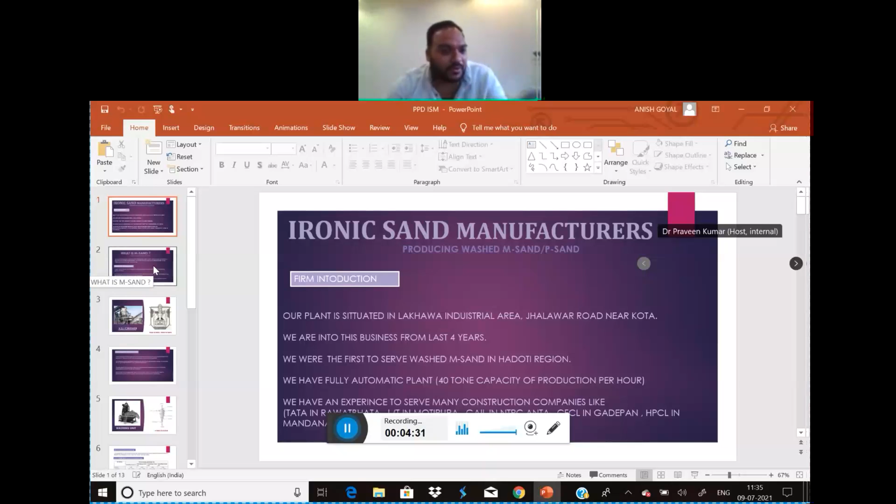So I would like to draw attention now to the basic point for which we are here, and that is what M sand is. M sand is manufactured sand. M sand is a crushed aggregate produced from hard stone, which is cubically shaped with rounded edges, washed and graded with consistency to be used as a substitute for river sand. So from this we can understand that M sand is made from hard stone. The shape of the granules or aggregate should be cubical with rounded edges, and it should be washed properly and graded so it can be used as a substitute for river sand.

First of all, in this definition, we have shaping. Shaping plays a very great role, because in the Indian standard, IS 383:2016, the first line says that the shape of your aggregates should be cubical. Only then can you call it M sand, or consider it a quality M sand.

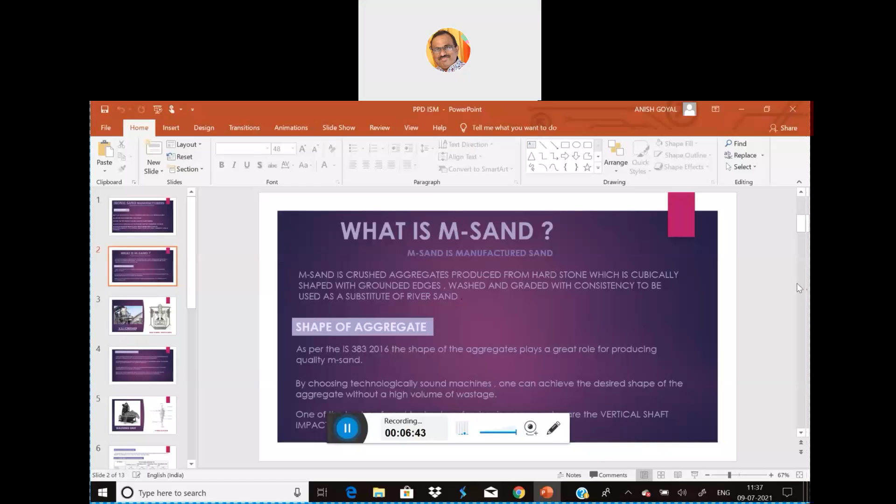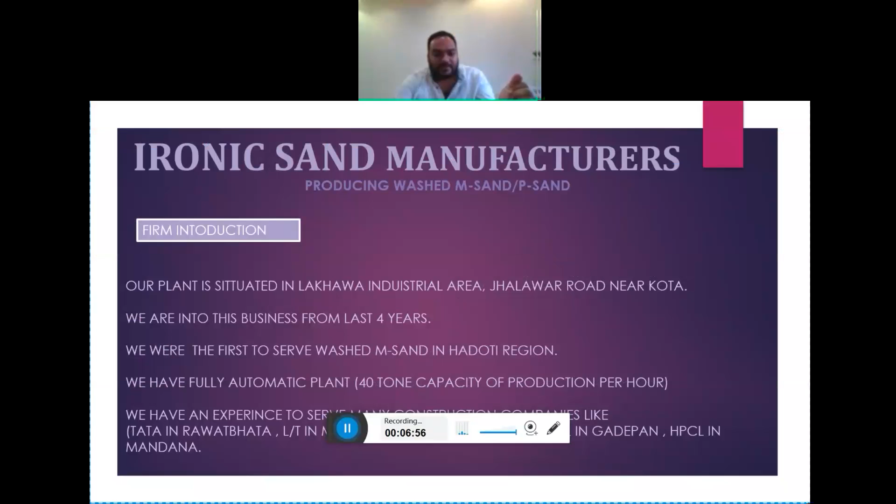You may use F5 or try to go through slideshow full screen if possible. We don't have that F5 in laptops. That's why I'm just finding out where. Maybe slideshow in the upper toolbar, slideshow is visible. Yeah, you may use that, from current slide. Now it's okay. Yes, sir. Very good, sir.

Thank you, sir. We have already discussed the first point, and the second point is how you can achieve this shaping of M sand, because there are many machineries available here in India, but only few of them do research and development before they make the machine. So when you are shaping your granules or aggregate, your machine should create a lower amount of wastage, because this will directly affect the operating cost of the plant.

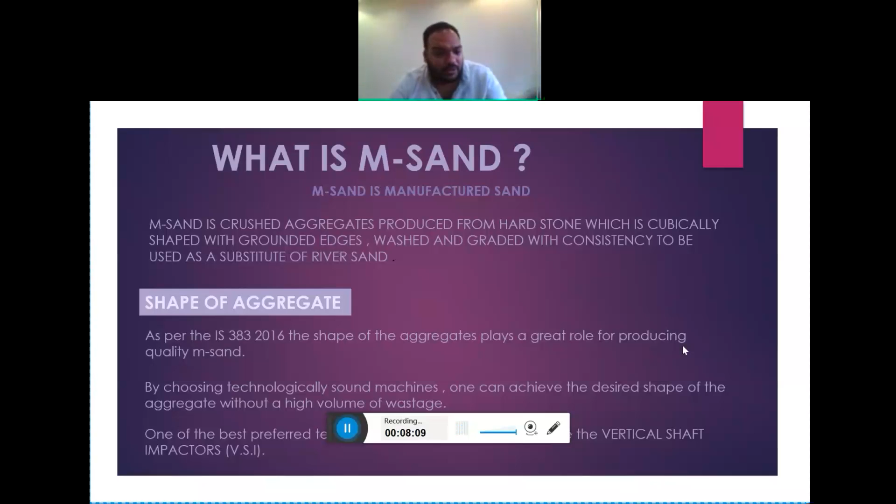So you can use very technically sound machines like vertical shaft impactors. You have some great companies here in India. They produce vertical shaft impactors with such technology that while crushing, they produce a lower amount of wastage. So in this slide, at the left, you can see the vertical shaft impactor, and on the right, I have shown the technology inside the vertical shaft impactor.

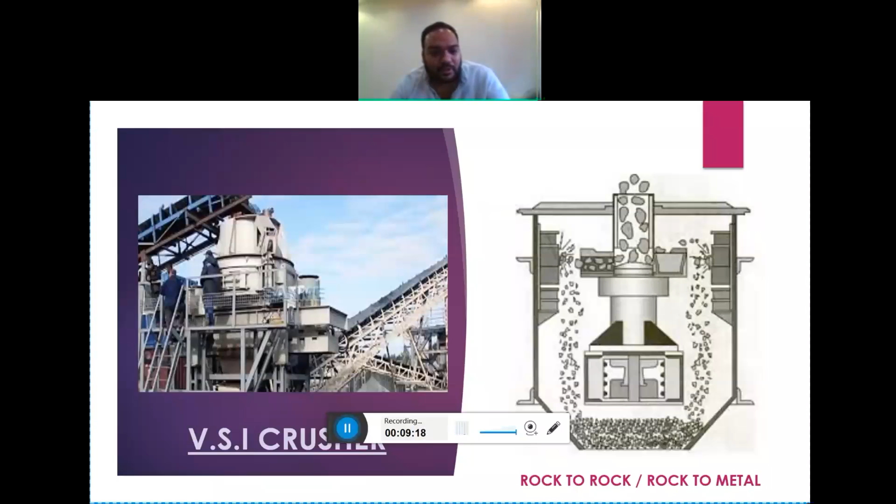They have two kinds of vertical shaft impactors: first is rock to rock, and the second is rock to metal. The first one, rock to rock, is for stones which are very hard or very stiff. And for soft stones, you can use rock to metal. So it will be very easy to shape your granules with metal in a soft stone without creating more and more wastage. The next one is washing.

So, washing of aggregate. Washing actually enhances the quality of sand, because when you wash the sand, it eliminates the high percentage of silt and other impurities which are produced during the crushing process. So generally a good washing enhances the quality of M sand and makes the workability better with any concrete or masonry work.

So the second point is the washing should be done thoroughly so that the silt percentage lies under 8%. If we want to make any grade of concrete and desire high strength, the silt percentage should be under 8% so that the sand does not react adversely with the cement, and if it does not react adversely, it will give you good strength in any grade of concrete.

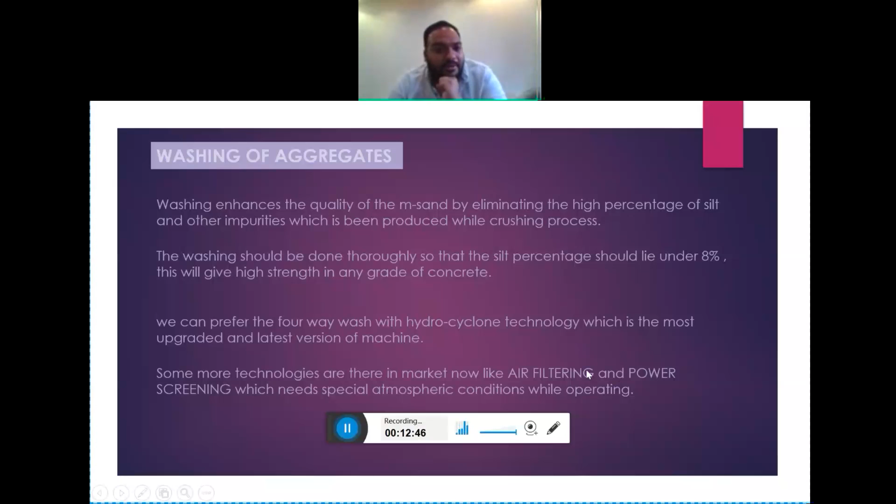So this was all about washing, and I have put some pictures to make you understand: at the left, these are hydrocyclone washing units, and at the right, you can see a hydrocyclone, and you can learn more from the internet about how it works and how it cleans the sand.

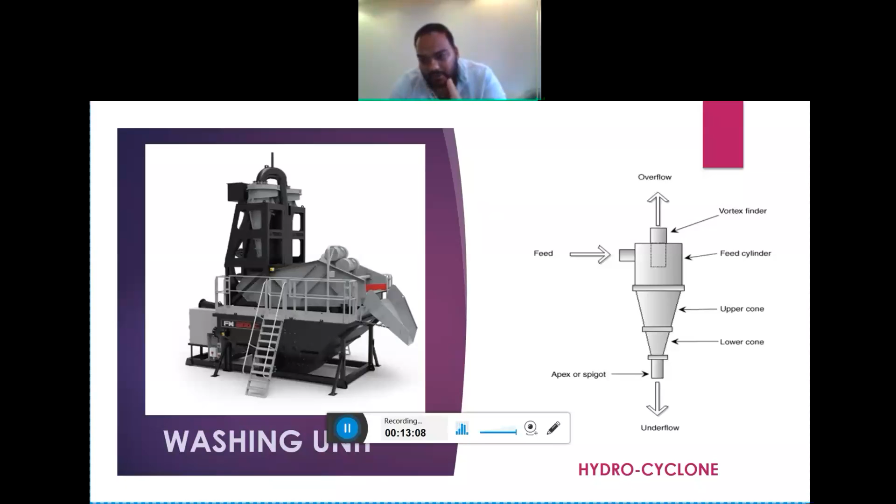After this, the definition says a good gradation. So the gradation of M sand should be according to the Indian standards, which will decide the category of civil work for which it can be used. IS 383:2016 specifies gradations like zone 1, zone 2, zone 3, zone 4, and whatever the gradation of your manufactured sand is, it will decide in which kind of civil work it should be used.

General purpose sands which we use in daily civil works are zone 2 and zone 3. Zone 2 is commonly used in masonry, RCC works and all, and zone 3 is generally used in plastering work and compact filling, etc. So commonly used sands are both zone 2 and zone 3. So one should try to make sand which lies under zone 2 and zone 3.

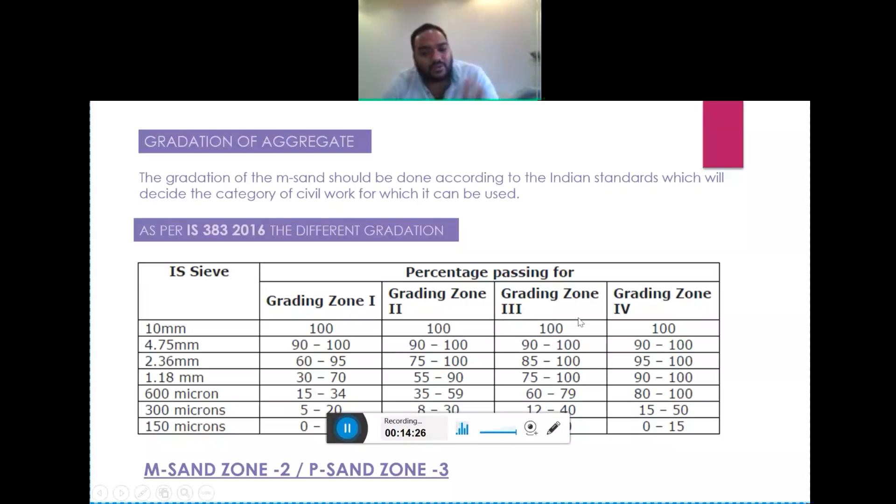There are some more tests that should be undertaken on sand. These are the water absorption of the manufactured sand, the silt percentage content in the sand you manufacture, deleterious materials, the maximum percentage of moisture, and the fineness modulus of sand. After ensuring these tests are positive, you can ensure that the quality you are consuming or making is appropriate.

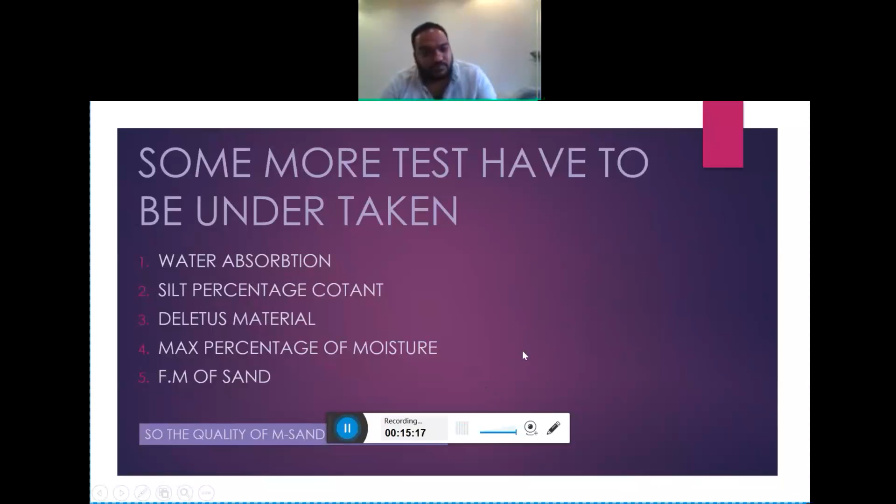After that, there are many advantages of M-Sand, but I have taken a few of them here which I seriously wanted to share with you. Nowadays we know that extracting sand from the river is like an illegal job. River sand is good, but only when new sand is coming into the river every year, and you don't have to dig huge pit holes in the river by mining river sand.

So extracting river sand from the river is harmful to the environment. It reduces the groundwater level and river water gets dried up. To prevent this, use M-Sand. Whenever there are big pit holes, they will not let the water flow. First the pit holes will fill, and after that water will overflow. So this breaks the chain of the river, and rivers dry up and the groundwater level is also affected. So to prevent this, we have the option to use M-Sand.

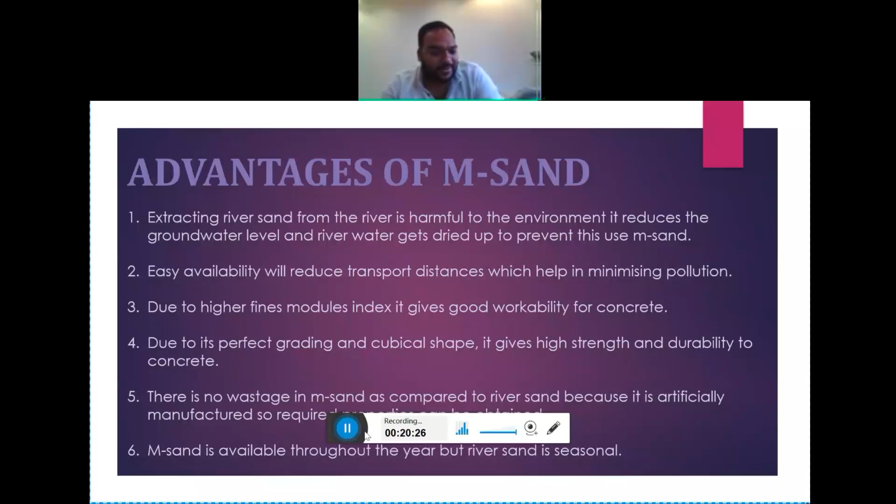The next point is there is no wastage in M-Sand as compared to river sand, because it is artificially manufactured, so required properties can be gained. It means that whenever we are manufacturing a sand, we can minimize the wastage because it is made artificially, so you can delete the negative properties or the wastage properties of this sand, but you cannot do it in river sand.

Whatever there is at the river bank, you have to mine it and bring it to the side, and then you waste things like big stone pebbles and some organic materials. They also come in the river sand. So we can save ourselves by not wasting extra energy and not wasting any extra labor by using M-Sand.

M-Sand is available throughout the year, but river sand is seasonal. As we all know, river sand is not available in the rainy season because it comes from the riverbed, and the riverbed is full of water, so they will not be able to mine the river sand. But M-Sand can be manufactured in any climatic condition. There is no problem to manufacture it.

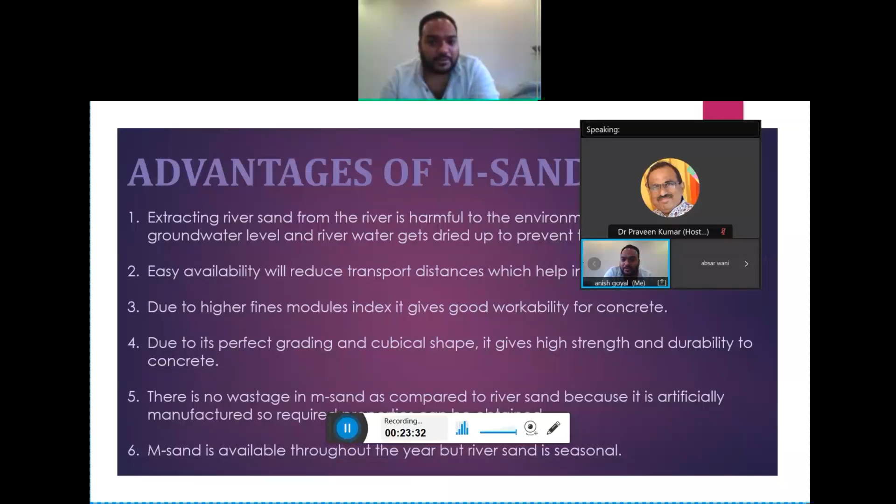So after the advantages, we have almost discussed what M-Sand is, and now I would like to throw a look, for those people connected with us in this meeting who have their plant set up or want to enter into this M-Sand business, at what I have planned. I have made a small diagram of what machineries I have involved in this plant.

From the beginning, you can make a hopper with any civil construction or a fabricated metal hopper, holding a good amount of quantity, and beneath the hopper you have a feeding machine. The material goes on the conveyor belts into the VSI crushing unit. I use a rock-to-rock pattern of crushing unit because my hardness of stone is 6 to 7.

After the crushing, the material will go to screening, and screening passes the material which we want to take as sand, I think around 4.75 mm mesh. The rejected oversized material will go back to the crusher for recycling, get crushed again, and come back to the screen.

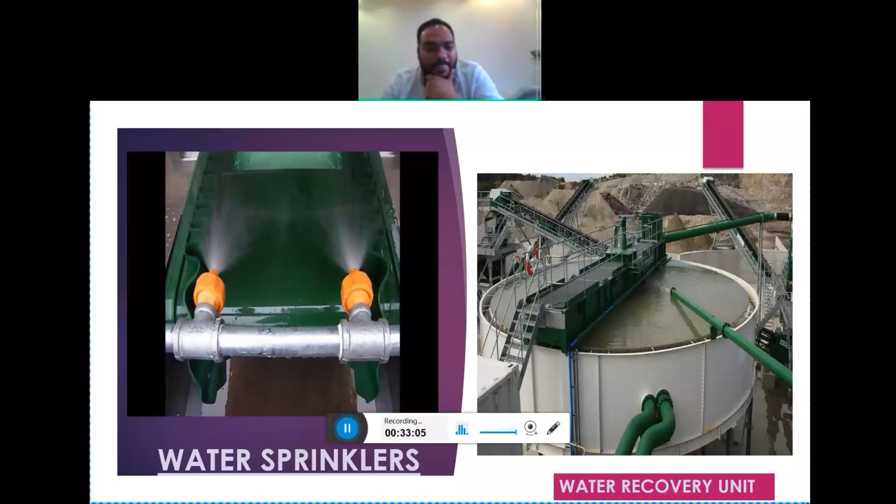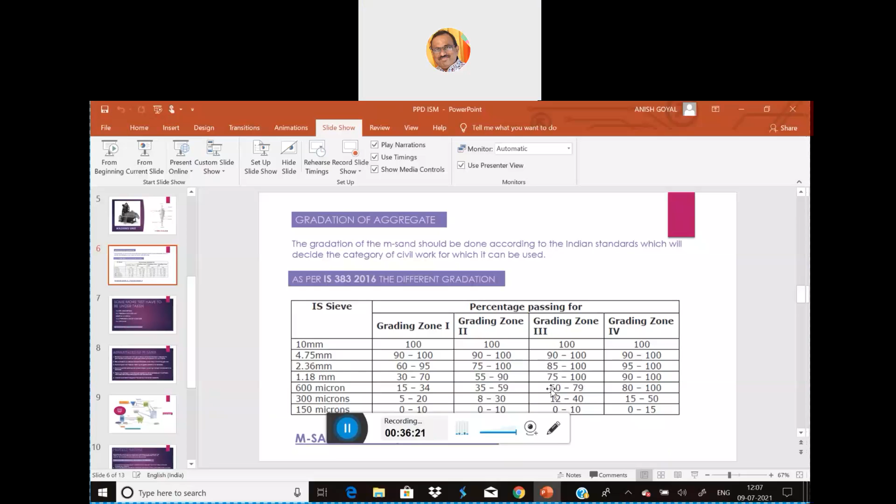Dr. Sudhir wishes to know what is the indicative cost, if you may share, of such plants. If you go for some companies that share their technology with foreign companies, you can get a 40-ton capacity plant at 3.5 crore rupees with all the equipment which I have in my plant. This is the cost of the machinery. Civil cost and land cost are different.

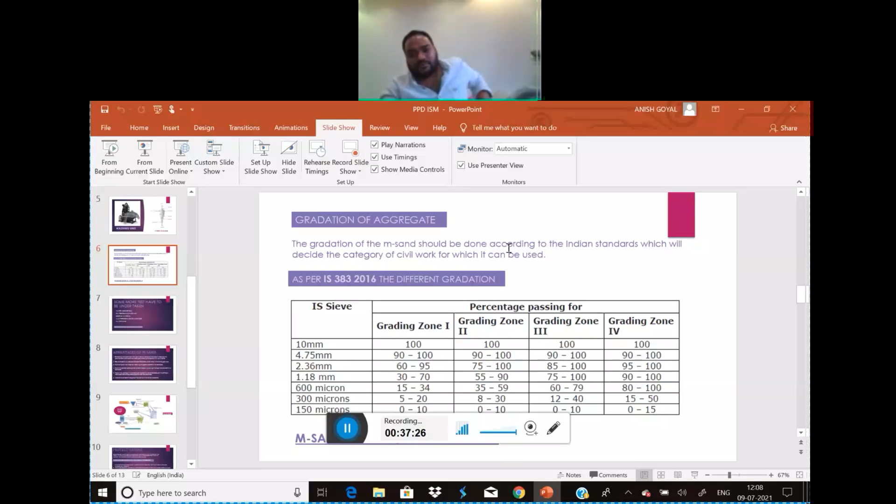They are extra. Land cost is also how much land it may require - you can say around a 40-ton capacity plant can be installed in 25,000 square feet. That is the plant area; stocking area is extra. So inventory or stocking area may be as much as the proprietor wants to keep - if they require more inventory, they can have a larger land area.

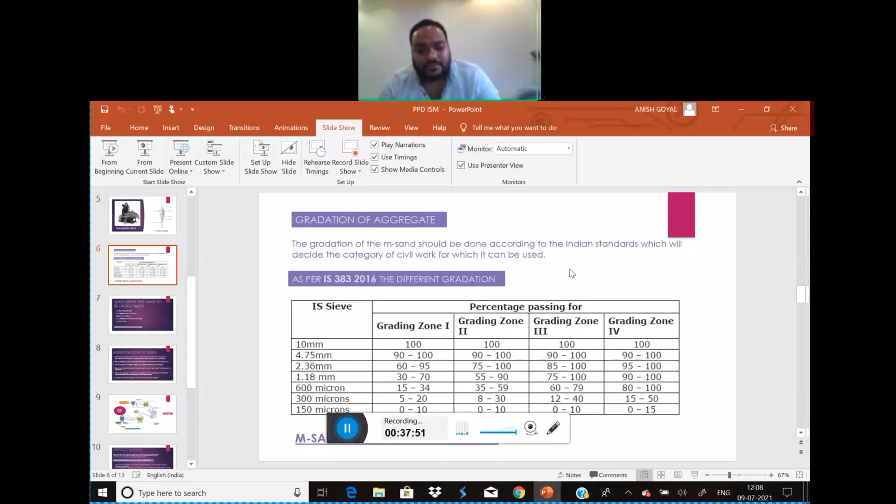Definitely. So I think the participant has got his answer. Now another madam wishes to ask - it is written in the chat, you may also kindly refer.

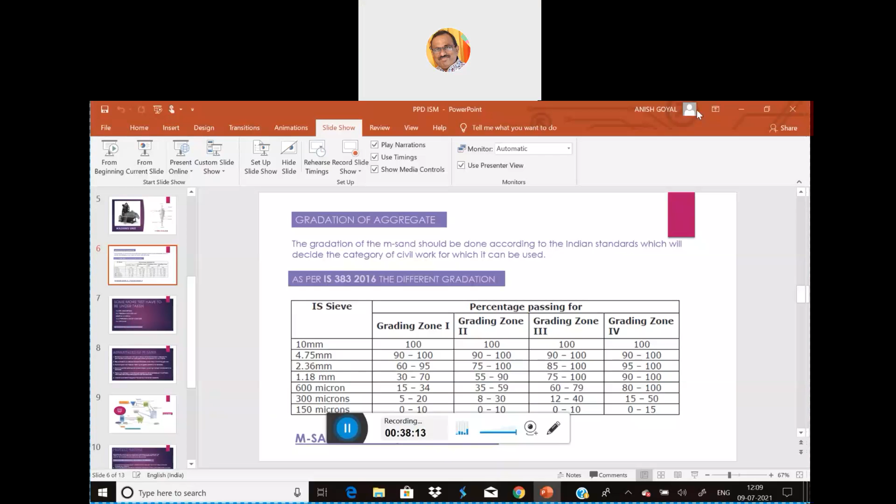She has written: what test is to be conducted to determine specific gravity of M-sand? Sir, I have no idea what test they should use, because I have also done it from testing labs. I think pycnometer test can be done, as we have been doing for river sand - the same pycnometer test can be used, if I am not wrong.

Another question asked by a participant: is it possible to use this M-sand for all kinds of construction applications - industrial, factory, residential? Yes sir, it is very much comfortable to use M-sand in each and every kind of construction work, because this is my experience - I have supplied to such large companies. They have used it in industrial foundation works, building works, dam works.

I want to give one example - I have also supplied sand to people here in Rawatbhata. They are working with Tata - I am a vendor of Tata. We are giving them sand, and they are using it in cooling tower construction, that is nuclear power plant cooling tower construction. So I think we can use it in each and every construction work - there is no problem in using it at any stage.